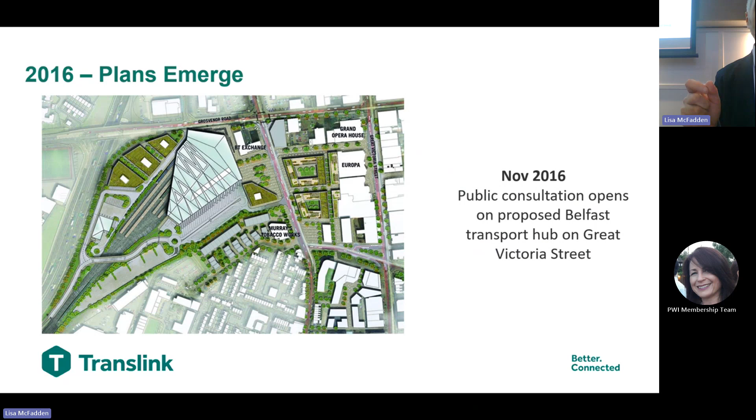But pre-delivery, there's a lot of work for engineers to do too, to make sure they're involved pre-delivery. Coming onto the next slide, 2012, 2016 were key years for the project. KPMG did a study in 2020 and said only 51% of projects are likely to reach their original intent and goals. They continued: the biggest mistake project teams and project managers can make is to assume, and the biggest mistake end users can make is to let them assume.

At that time I was involved in the project but incredibly busy, and we're a very small company, still quite small. But at that point I had to say, right, what do we need? Well, what do we want? I usually start with what I wanted. What do we want out of this?

And then I very quickly realized you're not going to get everything you want. But what do you need? What are you not willing to compromise on? Why do you need it? And where ultimately can we flex? Because on this site there's architectural, bus, rail, public interface, permanent way, and me sitting in the corner going, I demand this and nothing but this. So you had to know where you could flex and where you couldn't.

And I suppose coming out of that, for me, there were golden rules. Certainly you've got your standards and what's allowed and so on, but what's optimized and where will we not go?

Because we were so busy, early on there were conversations around what this was going to look like. When you talk to the operators about wanting all trains to go everywhere, well, we're not going to be able to allow that. Why do the trains need to go there? There were certain limitations on where trains could and couldn't go. If there wasn't a realistic need for the train to go there, we weren't going to build it, because of the risk associated with the S&C and the cost associated with it.

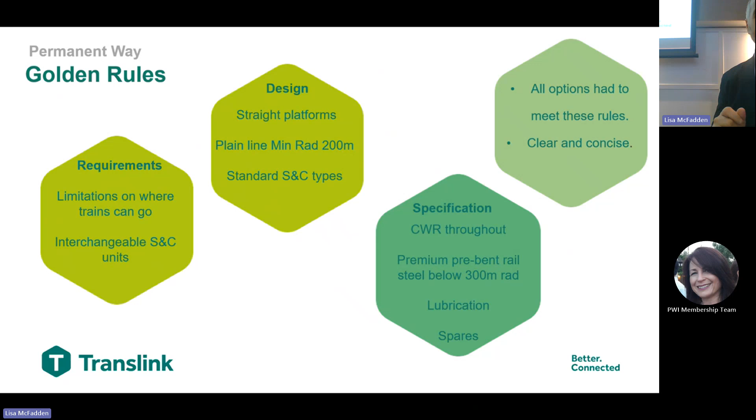The beauty of that was then, coming from that, the end position we got to - whenever it was ready for delivery, I remember being brought into a room and somebody said, we've got 42 different options, we've narrowed it down to 42 different options. Okay, do they all meet the rules? No, 17 of them don't meet the rules. Turns out you only got 25 options. And we got to that position straight away. It made it so much easier for us, because you weren't involved in all the optioneering, but you knew all of those 25 options met the golden rules.

They all worked for us. There's variations on a theme, but they all work. So really it was what was selected at that point in time was the best fit. Everybody didn't get everything they wanted, but I think everybody got what they needed.

How good a position is that to be in a project 4 or 5 years before it actually starts being built, that you know you're going to get what you want at that point. And the solution that we have in front of us today, which goes back to the solution that was on one of the earlier slides, met all the golden rules and many of them were bettered. So from my point of view, that was what needed to be delivered.

And then it was time to deliver. And Lisa's going to tell us how she went about delivering it for us all.

Good afternoon all. So today there's a clear vision we can hear from Translink's point of view, and starting in 2020 was my journey on the great Belfast Transport Hub, as it was a project, but Belfast Grand Central Station as we know it today.

So where is it for those who may not be fully aware of the Belfast area? It's in a quite constrained site, as you can see. It sits aside the Westlink. It's got Grosvenor Road, Durham Street, and an existing railway that went into Great Victoria Street sitting on the other side.

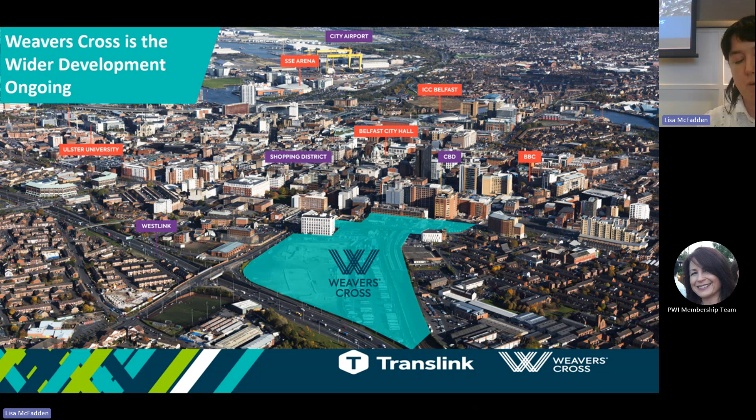There we've got an aerial view. Looking back, you can see the iconic roof structure at about 12 o'clock on the slide. And it's sitting within 15 minutes walking of the city centre. It sits right behind Great Victoria Street and the old bus station that we had.

So the project ambition was pretty clear. We want a transport-led regeneration project. We want to transform Belfast City and the wider Northern Ireland. And we want to connect local communities and neighbourhoods.

Mona touched on it earlier, decarbonisation has become a huge part of what we do. We want to set the high standard not only as a project, but also for communities and by social requirements. We want to see a construction project that does something a bit different. We also want to be climate focused, and there was a key purpose in how to deliver this facility on the ground.

So how did we get to this? For those that don't know, there's always clear interfaces. The building we will not be covering today. We're largely focused on the railway side, but it gives you an idea of the number of platforms - we went from 4 to 8. So we have a bit of a game changer from a timetabling and operational point of view too.

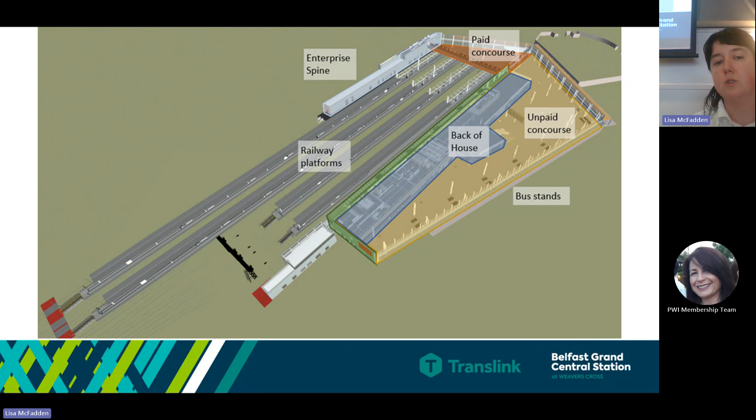More space for our operational colleagues, and we kind of keep touching on it - we wanted this to be a transformational project, a flagship, something to be proud of. We know rail has increased dramatically over the number of years. We know tourism is on the increase. So we want something to showcase this city.

We didn't get here alone, and I think this is the point where we need to go through our suppliers. Arup was the P-way designer for the tracks, and Mervyn touched on the key rules and requirements we set. Babcock was the S&T designer and also the S&T contractor. Babcock was the P-way contractor. Byrne was the slab track designer out on the existing railway corridor for the formation. And Arcadis was our NEC contract administrators. But TransLink on this project was the heart, and worked collaboratively with all these suppliers throughout.

I'd love to say we landed on site, we owned the land, and we could rock up and start laying track. It's never that simple.

The piece of land we see going through did have ground conditions that we needed to address. On the enabling works, there was also an existing Blackstaff River culvert diversion that was part of the enabling works in 2020 that needed diverted.

The NIROC was also quite a late change in the contracts where we basically said, okay, we have an opportunity where we have an old NX panel - it's time for an upgrade. Parts were getting difficult. It also became part of this project and was a separate contract, but with the same milestones and same program to deliver to.

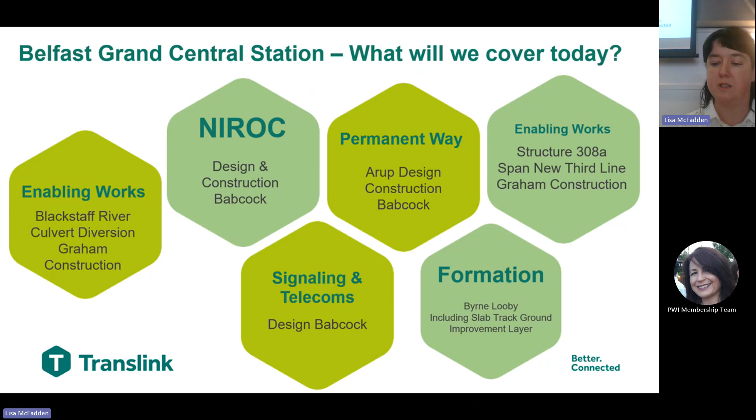Signalling and telecoms was all designed and constructed by Babcock, and the formation we will be touching on today is Byrne, but there was two formation designers in this project, one with the FSGV joint venture, Barnes & Sear, and one by Byrne, but again with transition zones and interface meetings to control that as well.

So where we start back in 2020 - what needs to be done? Unfortunately, there was a Blackstaff culvert sitting high across the site. We were quite constrained - I can't lower the Blythefield curve. We were very constrained with those existing levels.

We were a traditional track bed, so bottom ballast, top ballast in your rail. There's no slab track on this project. So therefore, with constraints with that depth, the culvert had to be lowered.

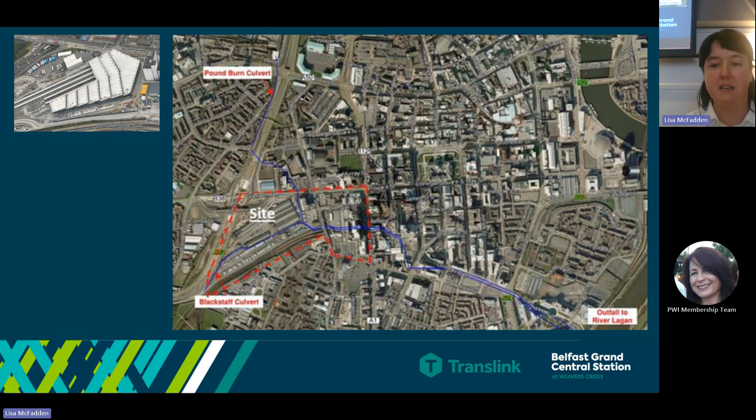This involves things like, before you start, ecology surveys, devegetation works, archaeology assessments, and working with our frameworks and contracts teams to basically get this in place and understand what we needed to do.

So the length was no small feat for Graham Construction. The length was 360 metres. We need a transition slab for the imposed train loading. We also had a 600-millimetre reinforced concrete section. And to put in concept, it was a 7-metre by 2-metre box culvert where we'd cross the P-way.

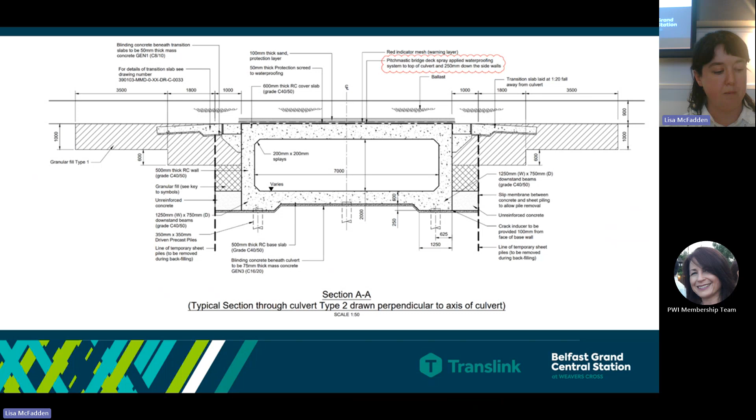I've kind of shown a slide the cross section. So you can see there the 7 metres by the 2 metres, the internal dimensions. You can see the thickness of the slab. And you can see this was basically under the railway lines as they approached the new station, while the eastern part was under the new bus terminus.

I've also included a slide to show the transition slab that was right on the western end of the culvert, between the new P-way alignment, and then obviously considering this was a design working life of 120 years, a category 5 in accordance with BSEN 1990, and also making sure the hot, hard and soft spots was also addressed.

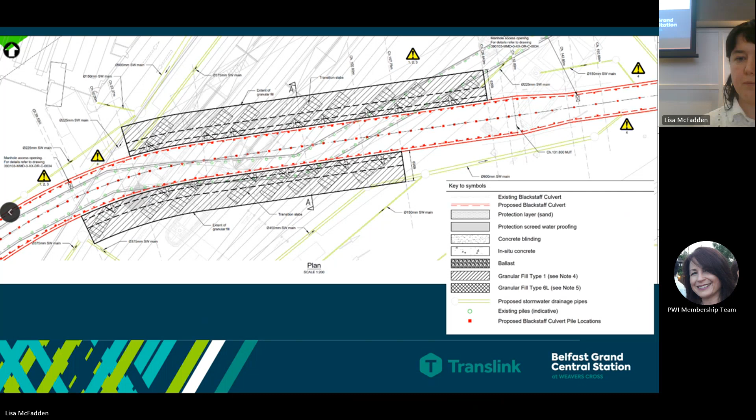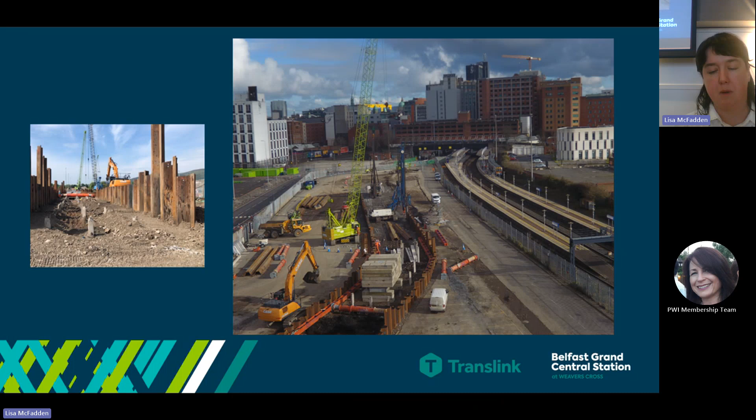Throughout this project, there was extensive site supervision, rebar checking, and one of the key things that was done on this site was the amount of work you could do on the brownfield site. So basically, get as much work done that's outside the existing railway corridor as possible to de-risk the back end of your programme and ensure successful delivery in 2024. And that theme is the whole way through the project.

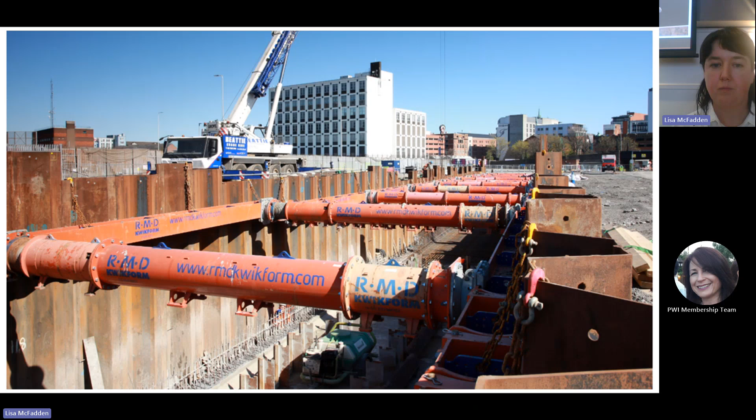Another kind of good drawing there shows the Graham Construction as well, just the scale and the size that traverse the site. That point in the photograph is where the new railway tracks crosses into Belfast Grand Central Station.

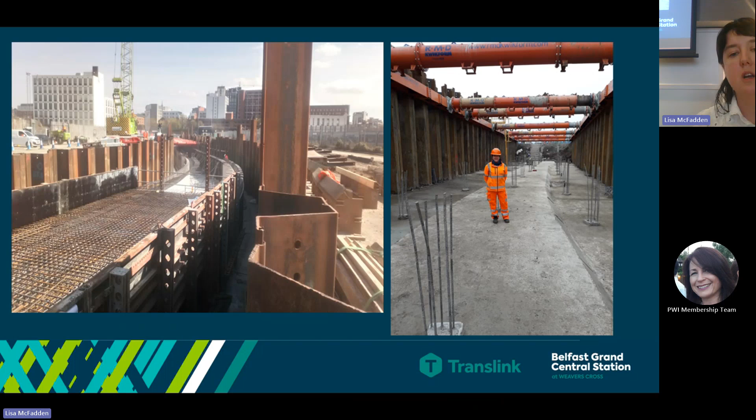Again, you can see the size of the reinforcement deck and all reinforced steel. Also, I should point out this was in 2020-21, probably not the most ideal time with supplies and materials and trying to get it. There became quite a logistics challenge from a program manager perspective to make sure you had everything sourced and then acquire more land to place the materials on.

It didn't stop there. Also for 308A, there was an existing pedestrian bridge, so we had to increase the length of the steel bridge. This was delivered under Graham's Construction under the enabling works.

Basically, in order to widen, there's an up and down line, but we also need the additional line coming into Belfast Grand Central Station. You can see a lot of groundworks - we had to provide 8 soil anchors, approximately 70 metres long, to support the existing east abutment, and 8 mini piles to support the new east bank seat.

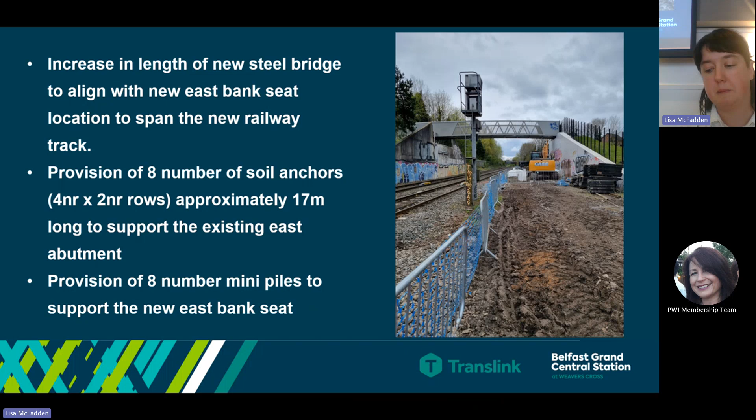There was a relocation of the east bank seat about 3.5 metres back from the existing east abutment. One of the challenges is when you do your groundworks, we hadn't moved the track at that point, so clearances was a big thing we had to be careful of, since trains were still running into Great Victoria Street. There was a lot of signal sighting consideration working with our colleagues to make sure the ground anchors didn't pose any signal sighting issues.

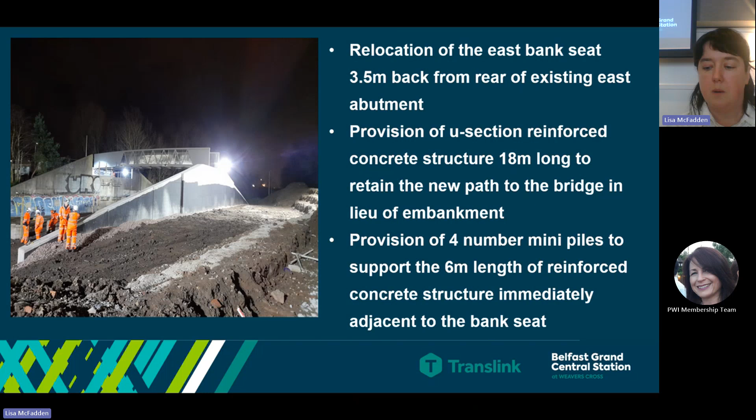The railway formation design was a significant amount of work, more than probably any of us ever imagined in 2020. There was an area of 150 metres which was poor ground - this is basically as you go between pedestrian bridge 308A and the new busway bridge, which I always call the rusty coloured corrugated steel bridge, that crosses a 51 metre span over the new railway.

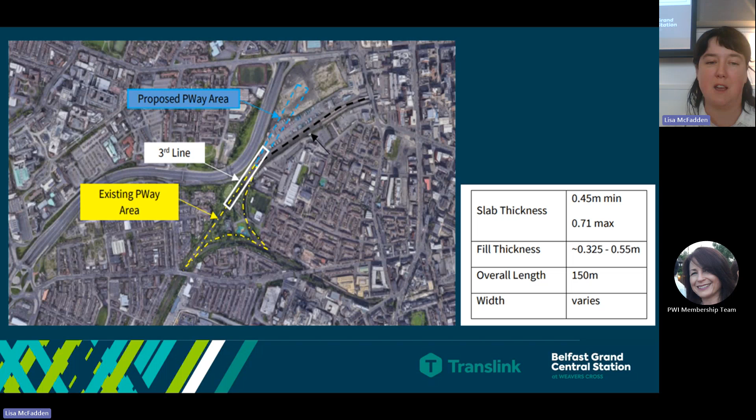We didn't install any slab track - we wanted to respect the maintenance requirements as well, so we wanted a standard construction makeup of the railway track. Below the ballast is a 600 mil depth reinforced in-situ concrete slab to support the settlement requirements. There were quite stringent requirements set from the start, but the whole point is that we do not need to maintain this for a significant amount of time.

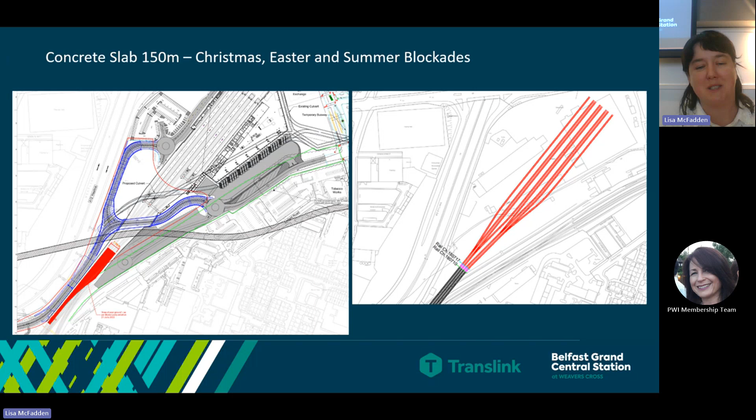It wasn't that easy because unfortunately where it spanned under the brownfield site, behind the railway corridor, was where you could work during the day. Unfortunately, the bottom of the red sat directly above the existing railway that went into Great Victoria Street, and then we had a construction street environment to construct the top left part.

So we had to use 3 different blockades to get this constructed. We did a lot outside the brownfield site, but we had to utilize the summer and Easter blockades. We couldn't pack everything into the summer blockade, because that would mean the blockades keep extending, which has a knock-on effect on revenue.

So we looked at clever ways to pour the interface at Christmas, get as much done by Easter, and then leave the area in red to complete at the front end of the summer blockade in May.

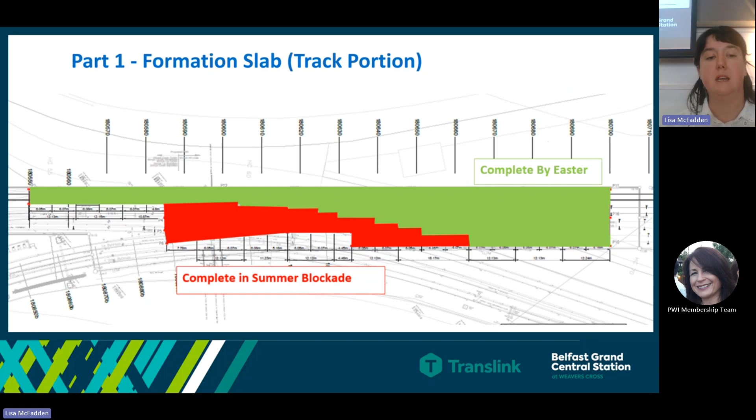The signalling and telecoms in the permanent way - probably why we're all here. We're finally able to get into the ground and deliver. We've done our enabling works, and now we're at the point where we can actually lay track.

I picked this slide up again because it's a good reminder of the scale of where we come in and set the track, in the Blythefield curve and into the Belfast Grand Central Station, and also the extent of the signalling and telecoms. It's pretty clear, due to the size and scale of changes to the permanent way in Belfast Transport, it required significant new and modified S&T infrastructure.

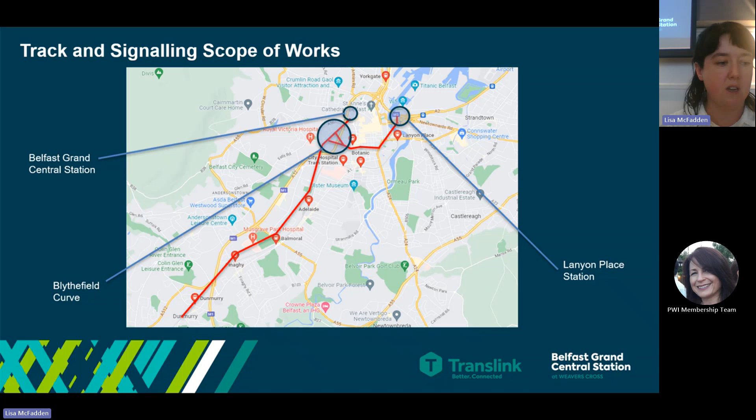A new route relay interlocking has been provided for the new Grand Central Station, and that's to replace the existing Great Victoria Street system.

This new interlocking is the largest built for Translink, and one of the largest installed in the UK in recent years. So it's important to keep that in mind, and also a reminder that you can't keep packing everything into a blockade.

Before we got to 2024, there was a lot of ancillary civils and advanced procurement of contracts and materials, because there was a race against time of procuring steel, relay rooms, PSPs, and types of cables, all with very long lead-in times. So we couldn't wait until Easter 2024 - we had to get a plan in place.

One of those things was basically understanding what advanced goods we needed to have. But logistically, that also gave us problems of where do you put that.

Easter 2024 was a great trial run. It basically helped us understand if our compound works, our logistics, how to access track, how well the whole team works. It was the first point, from a permanent way track installation perspective, that we got to see how we all work together - the first real test from a P-way point of view.

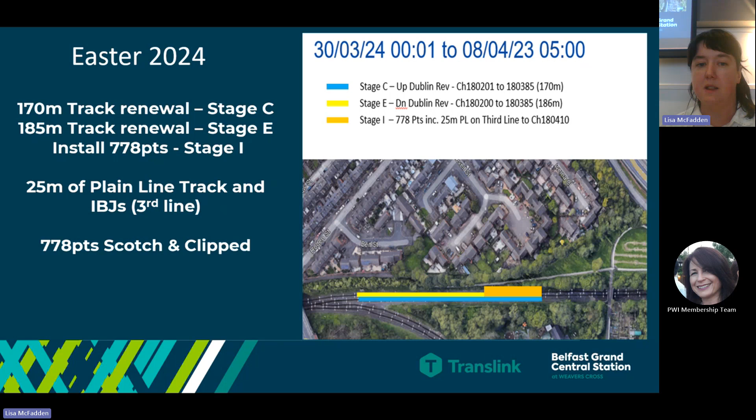In Easter 2024, we did the little area you can see in yellow and blue - 170 meters and 186 meters, on the up and down Dublin lines. We also put in the 778 points. You can see the area we're talking about, just at the back end of 308A.

One of the challenges the teams faced was what plant, what resources, what do we have available - which, coming from Network Rail where you've got an endless amount of suppliers at hand, is different, because you very much have to work in that lean way in Translink.

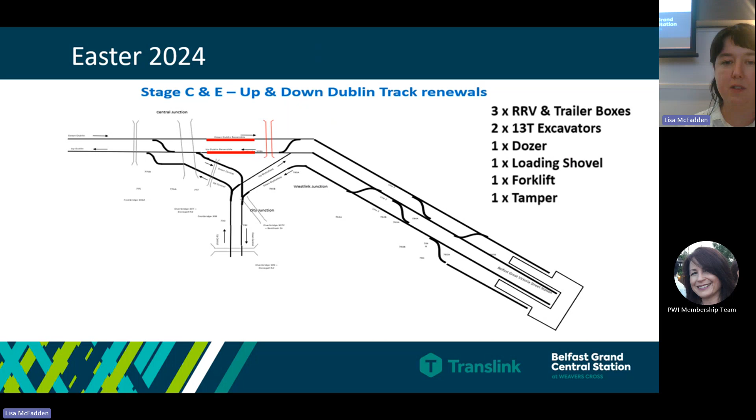We had 3 RRVs and trailer boxes, 2 13-ton excavators, 1 dozer, 1 loading shovel, 1 forklift, and 1 tamper, and we delivered the plain line. It was a good test to understand how everything was going to work for the big blockade in summer.

To give some context, and I have the same statistics for summer: the ballast was 1,300 tons, spoil 3,300 tons, sleepers 530, plus the points and the type fill. Not on a huge scale, but it tested the water to understand how we work logistically around each other.

We also had the main works contractor working on the other side of the boundary fence, so there were certain interfaces and also how to work from a CDM boundary that had to be considered.

Here's some photos of laying the track. It's quite visual as we go through the slides now, and you can see what we've installed - that's the up and down Dublin, and you see in the first photo the 308A that was delivered during the enabling works.

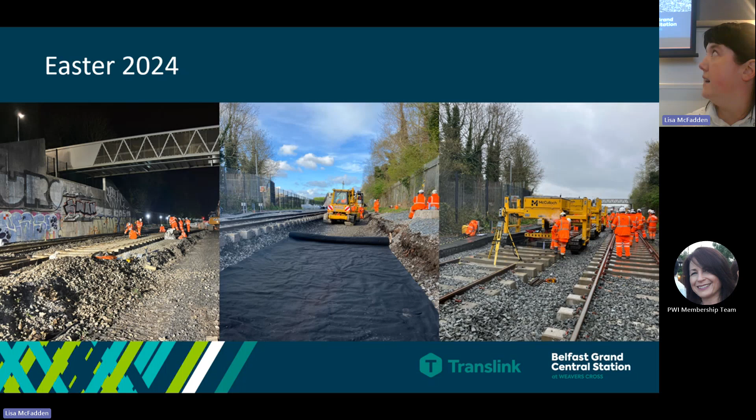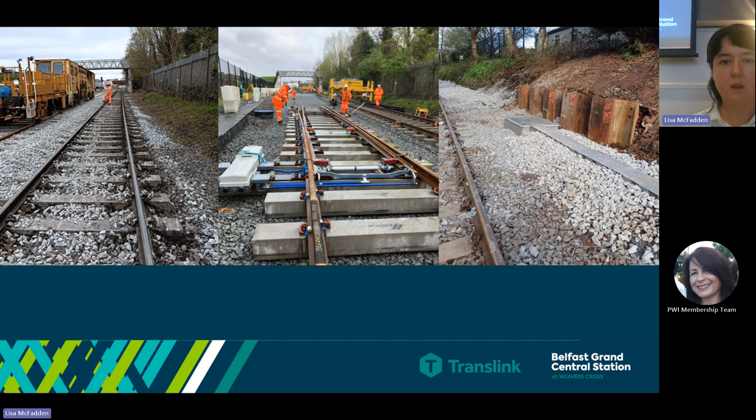Here's a nice schematic plan showing the 778 points with bridge 308A there in red, and a few more photos showing 778 and the tamper in for the completion of the works.

Mervyn touched on it as well - there was a lot of work and requirements stipulated from the start. Some of the key information: the P-way and S&T was largely undertaken during Easter and the main blockade in summer 2024. We'll go through that more in the slides as they come.

The details of the wheel-free limits and the signalling protection, the operational arrangements, was also undertaken to facilitate whole system integration, including NIROC. Same milestone, same dates, had to come as one - one depended on the other. You couldn't deliver BTH, or Belfast Grand Central Station, without NIROC. Apologies - NIROC is Northern Ireland Rail Operating Centre. We'll explain that shortly.

The plain line sleepers were the NIR01 and NIR19 types, concrete throughout the project. Concrete sleepers with undersleeper pads were used throughout the project.

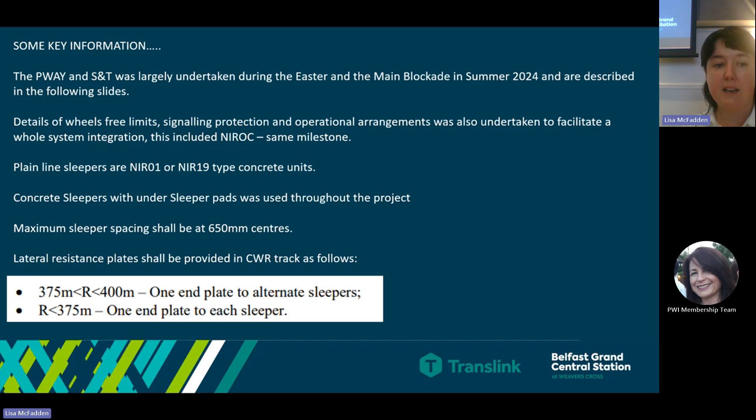The maximum sleeper spacing shall be 650 mil centres. We had lateral resistance plates provided in the continuous welded rail track, with certain criteria to follow too. The maximum length of rail between two fish-plated joints was set at 18.3 meters. The minimum ballast depth beneath the design bottom of the bearer was always kept at 300 mil.

The track filter drainage was used throughout and was designed to network rail standards, to the 1 in 50 plus 20% climate change, checked for the 1 in 200, and checked for the 1 in 500. So basically future-proofing, that we should never have wet beds on this job.

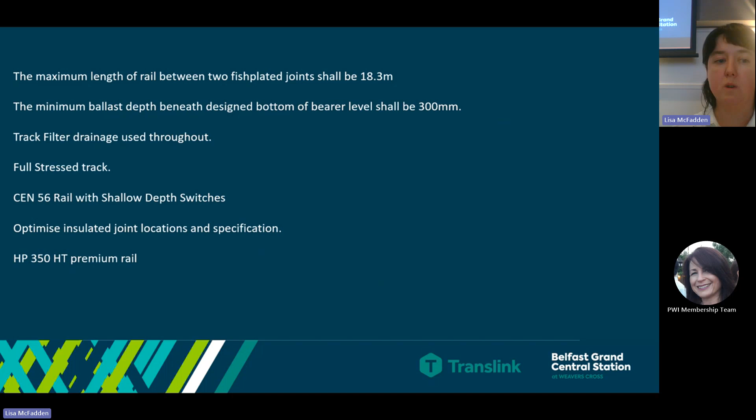We also wanted a fully stressed track. We used CEN56 rail with shallow depth switches, and used optimized insulated joint locations and specification. We really wanted to start using premium rail on this job too, and use it throughout. Again, the maintainer was always at the forefront of our mind, helping to reduce maintenance in the future.

So we've touched on it earlier. NIROC was very much a part of the project, and the project teams all sat together, bringing the S&T, the P-way and NIROC in on the one date. So what is it? Because a lot of people don't realise Northern Ireland Rail Operating Centre is a new ROC.

Based at Lanyon Place Station. The railway operations in Northern Ireland are currently controlled from three separate signalling control points, namely Belfast Central, Portadown and Coleraine, which a lot of people largely know. TransLink had a strategy, same as the vision for Belfast Grand Central Station, to eventually abolish each of these signalling controls and rationalise them into one regional train control centre located at Lanyon Place.

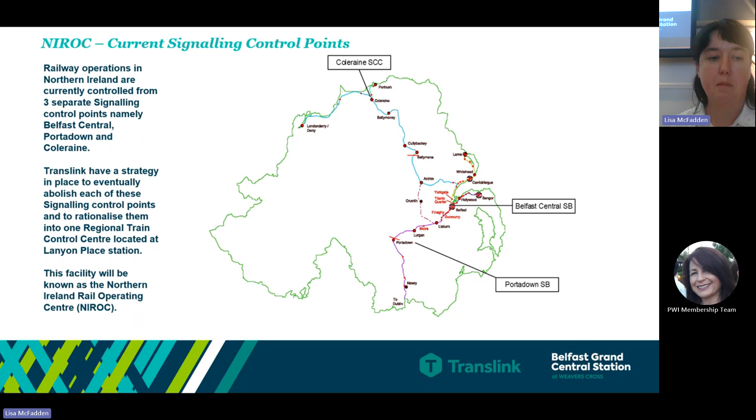And this facility is now known as NIROC. So as you can see, there are some photos. So the changes would be necessary. As we said, we'd use an old NX panel. Parts were getting very expensive and difficult to source.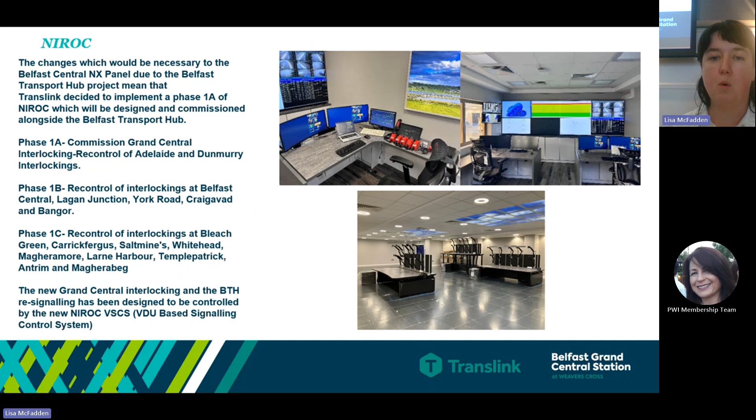We also had a live operational bus that ran through the site at all times, apart from a couple of little mini blockades where we had to build out roundabouts, but it largely never stopped running the bus operations through the site. You can see logistically how hard it was.

We had to install new wraps to allow the nighttime working. CDM boundaries were checked weekly, sometimes daily, and reissued to all contractors, and that was quite a feat. The boundaries were always moving, always making them secure and making sure health and safety was at the forefront.

But there was so much that, from a railway systems point of view, needed to get integrated, like bonding plans and the commissioning plan. I've never seen a more detailed commissioning plan to make sure the entry into service ran so successfully.

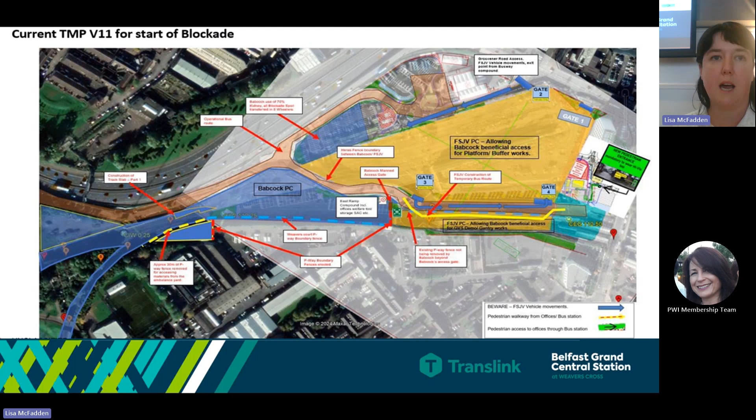If I was to describe my job, I'd say it's like a Tetris puzzle. The pieces fall fast and you just try to make sure there's not as many holes or gaps left in the puzzle. And if you do, you get a contingency, a mitigation plan, and fix it.

This was delivered successfully with the whole team. This diagram shows, as we go through the slides, how the phasing of the P-way and the S&T was delivered.

You've got the up and down Dublin lines shown in blue and pink at the top, with the new line coming in as well. We've got the Blythefields in yellow, and then the up and down Central, shown in the old green, which is now just one chord, the Central reversible.

It gives you a feel for the amount of materials we had on the left-hand side. We had 3 panel lifters, 3 TRTs, and 2 small dozers, but things like McCollam's panel lifters made things easier. One of the biggest things that really seemed to help was having track dumpers rather than rubber-wheeled ones. The 360 turn, able to get in and out quickly on site, really helped from a program point of view and ensured everything ran smoothly.

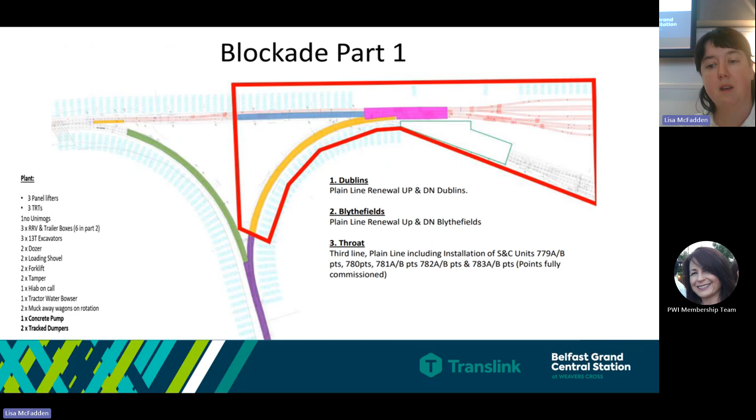There was such a detailed hour-by-hour program, which, to the credit of Babcock, kept everything quite robust and realistic in terms of what could be achieved. We started on the 11th of May 2024, when Great Victoria Street closed for the final time. There was 11 hours of signalling.

As you can imagine, in the first 11 hours of the blockade we needed to be wheels free. There was all the decommissioning from Great Victoria Street, and the area shown in black, which is now becoming redundant on the right-hand side going into Belfast Great Victoria Street, needed to be burned out and stripped out. That area is now the new bus yard.

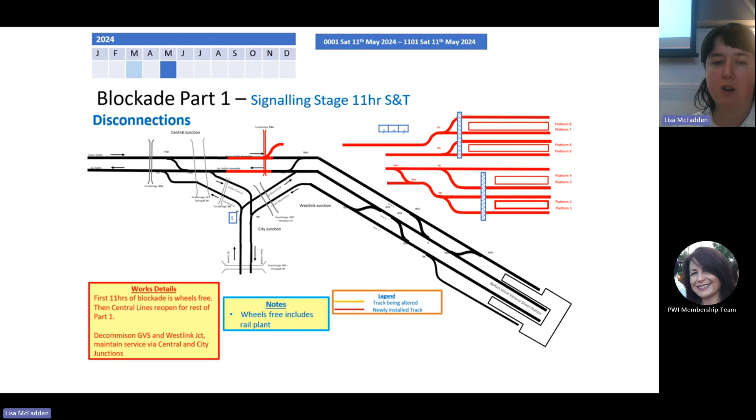So there was a rapid speed needed come the 11th of May by both contractors, from a lay-down area and also from a bus yard point of view - straight in and straight out. I always found the different phases interesting; at the 11th of May, for one week, you could see the intensity with the amount of heavy engineering works required for the amount of materials being lifted out.

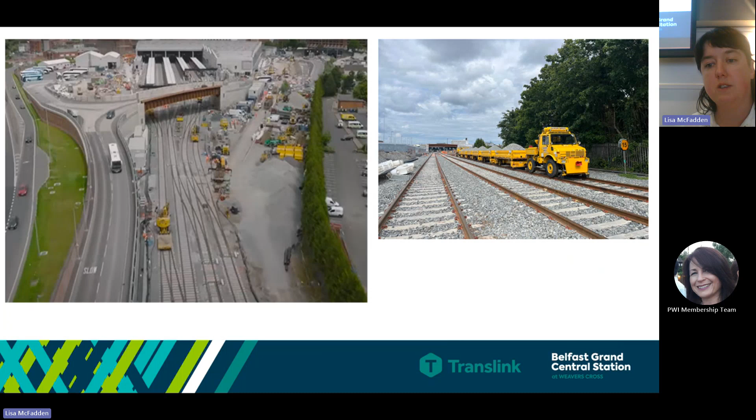In 2021, we also awarded ancillary civils contracts to Babcock. There was an extensive amount of troughing work, bases, and drainage, using the rules of the route called T3 possessions, meaning you work between the last train and the first train to install all those civils-type assets. That was one of the biggest, and probably most challenging, periods we had.

I'd describe it, when I spoke to my mom about what the work was like from 2021 to 2023, like peeling the biggest bag of potatoes. It's tedious, it's repetitive, it seems to keep going on and on, but the beauty is the roast potato at the end - that's the only way I can describe ancillary civils.

It just seemed repetitive, dealing with problems as they came. If we hadn't dealt with those problems, we would have been in a very different situation going into the summer blockade. It meant all the uncharted services, the sheet piling, and all the heavy, bitty work was cleared before we got into the main blockade.

We also had to work very extensively with our colleagues in operations, because it's not easy to shut down a railway for this length of time. There were hours and hours spent going through blockade strategies, understanding our revenue time when it's not as peak, and using the summer blockade as an ideal opportunity.

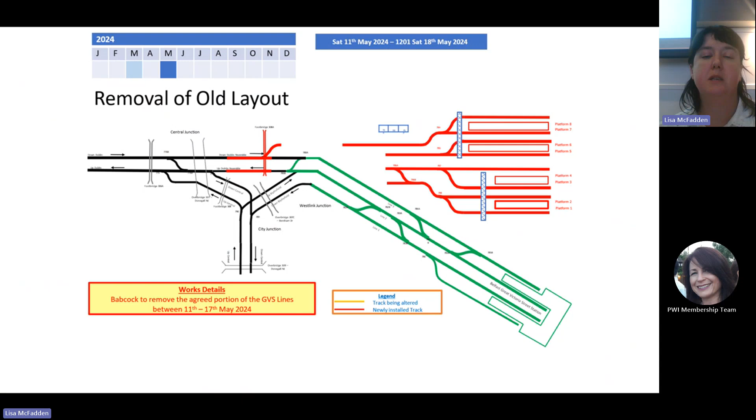In 2021, to try and beat the markets, we procured all of our rail, 100%, and procured all of our sleepers. But where do you store it? So we had to acquire land out of this project.

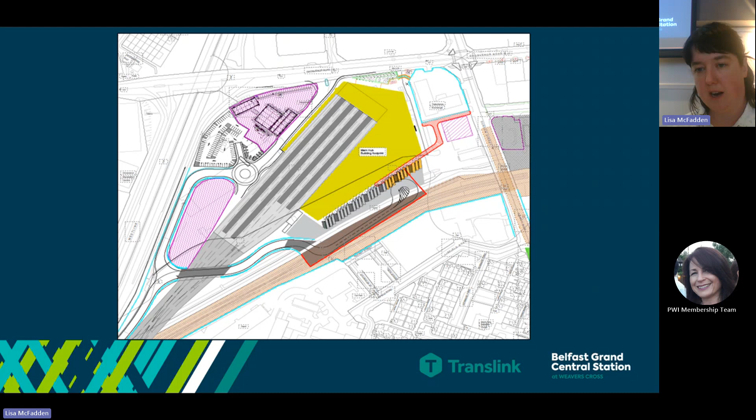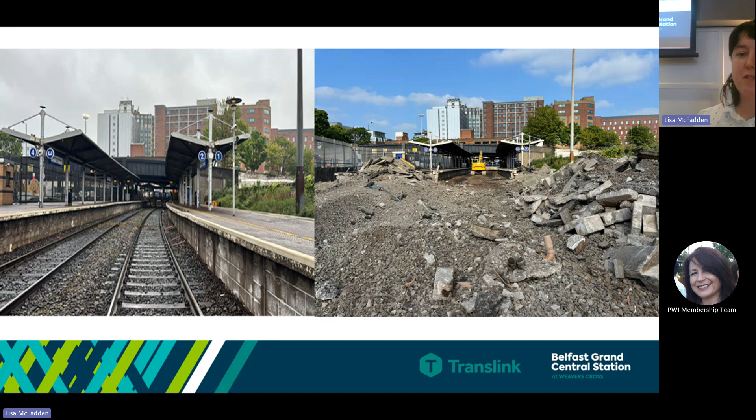There's some good photos. This shows Great Victoria Street on the left, and that shows literally the day after, on the 11th of May, just a couple of days after, how quick we had to go in and strip out and be ready.

So 11th of May, stage 3, it kept going. You can kind of see from the 11 hours of blockade, wheels free. You can see the Adelaide and Botanic, the Charlie Limas that we were basically working on.

The wheels free period is also quite challenging as program manager. It's basically a lot of coordination with the wider business. You can't have other people out working, obviously steel on steel, so it's just getting that communicated across the business.

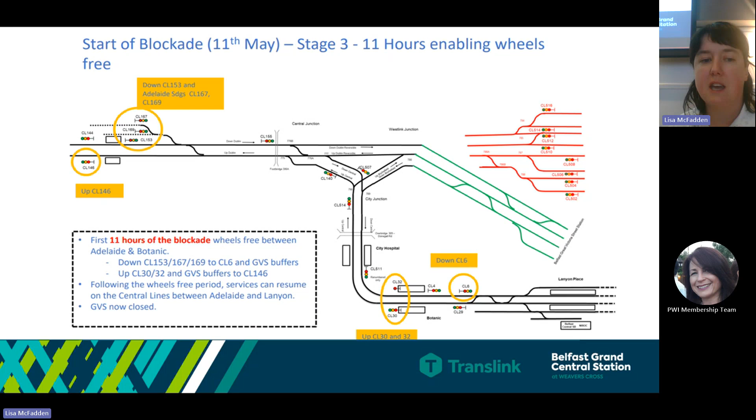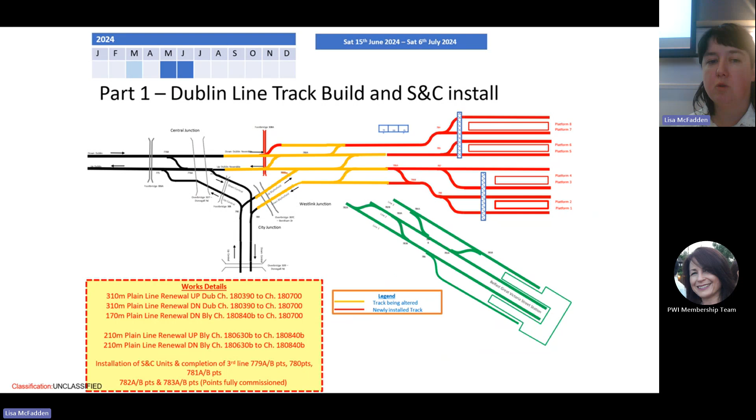We continued on, so that's a good idea of the scheme plan with a bit more detail. Everything in yellow is what we built in part 1 of the summer blockade. I say part 1 because at this point, everything was running into Lanyon. So the central lines, up and down, central, were still operating, but it was only Great Victoria Street that was closed.

We've got a few photos that show the sequence of work. In week 1, you can see the scale, the amount that had to be ripped out, the amount of laying, and then you can also see the concrete pour on the bottom right of the slab that had to be done for the remainder of it.

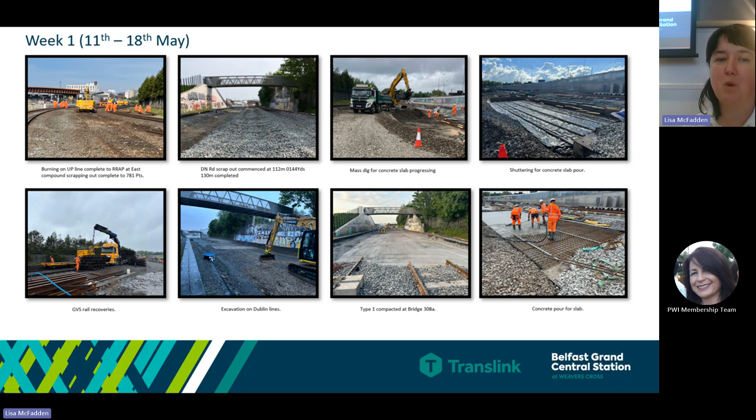That actually created a challenge because it creates a bit of a constraint and a bottleneck on your site as well. So that's poured, cured, and ready for loading. Again, working with suppliers and designers, looking at accelerators and how we can speed that process up too.

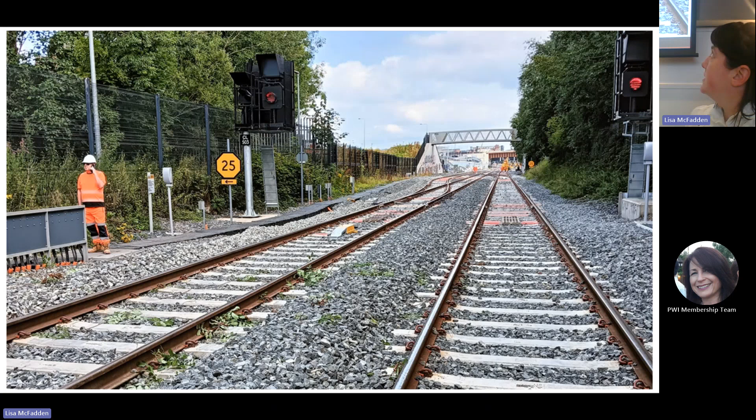Photos looking back towards the station. That's from Bridge 308A, and you've got the busway structure in the background. Again, you can see your crossovers. And that's looking again towards the station, which is at the furthest point in that photo.

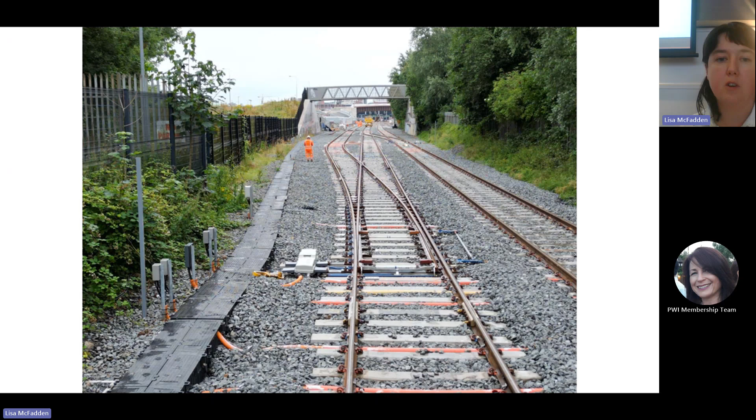Some more photos that people probably don't see, what works behind the scenes - topping up stone, the tamper on site. Our S&T colleagues always feel like they never really get a fair amount of photos. It's always the big p-way stuff, but there's loads of signal and telecoms work too.

I've learned so much about tamping and so much else from an S&T point of view on this project, but continuous testing and commissioning to make sure every system worked as a whole. So there you can see the works in effect during the blockade, all the amount that had to be done.

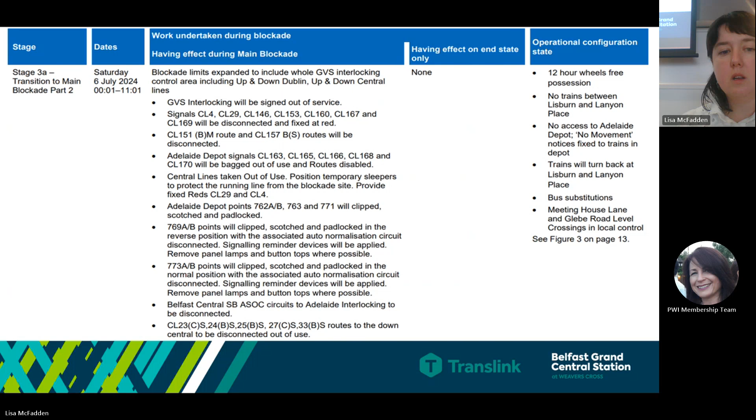Then part 1 is where we transition into part 2, and this commenced on the 6th of July. At this point, this is when Lanyon, the lines around Lanyon, close. So that means City Hospital comes out, Botanic comes out, and the wider disruption, including the enterprise, started.

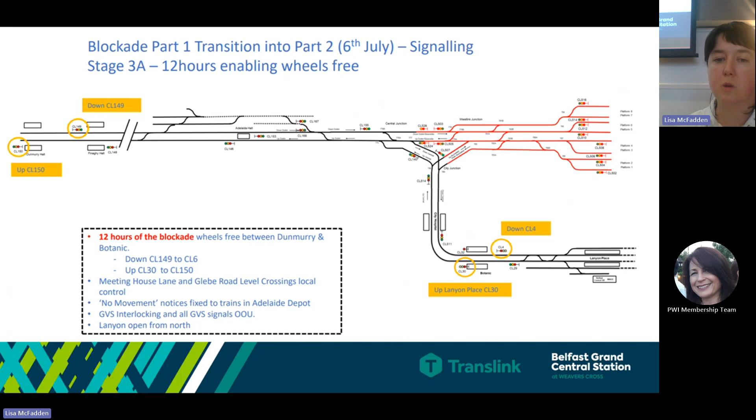Again, you start off in your stage with 12 hours enabling wheels free. That allows our S&T colleagues to go out, doing a lot of disconnections, getting the GVS interlocking and the GVS signals, and then only Lanyon at this point is open from the north - so basically your Bangor trains and your trains to Coleraine and Derry, Londonderry.

So in part 2 of the blockade, you can see everything in red is now built. Halfway, probably on the screen to the right, was built during the brownfield prior to the blockade. Everything in red there on the Blythefields - the up and down Dublins were built previously during Easter and part 1, and now we're focusing on the centrals, the up and down centrals, making those interfaces and connections where before we could only go so far because of the live railway nature in part 1.

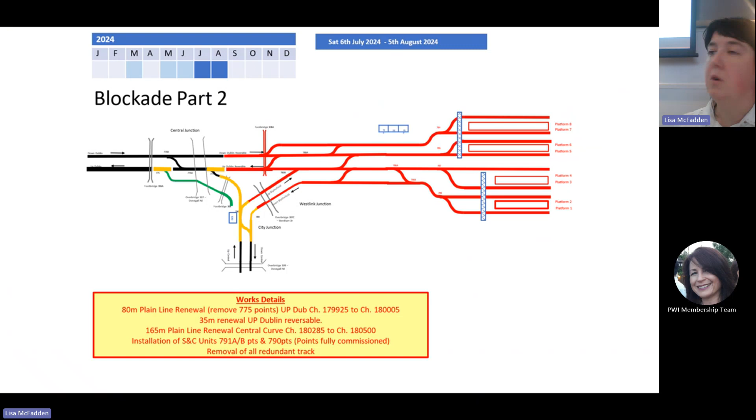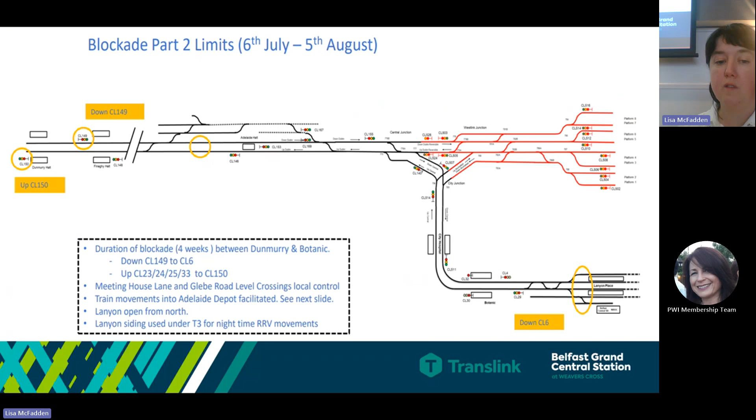So this blockade was 4 weeks. It really was between Dunmurry and Botanic. It includes things like Meeting House Lane and Glebe Road level crossing controls, a lot of limited train movement into Adelaide Depot. So there's a huge amount of coordination as program manager with them as well, using Lanyon sidings and any way we can from a siding point of view for RRV movements. That was critical as well.

Got a few more photos of this in part 2. This is very much looking at the photographs on the centrals, and obviously it's just a central reversible now. As Mervyn touched on, now the trains come into Belfast Grand Central Station for Portadown. It's a terminus station, and then they go back out around Lanyon rather than going from Portadown straight to Lanyon.

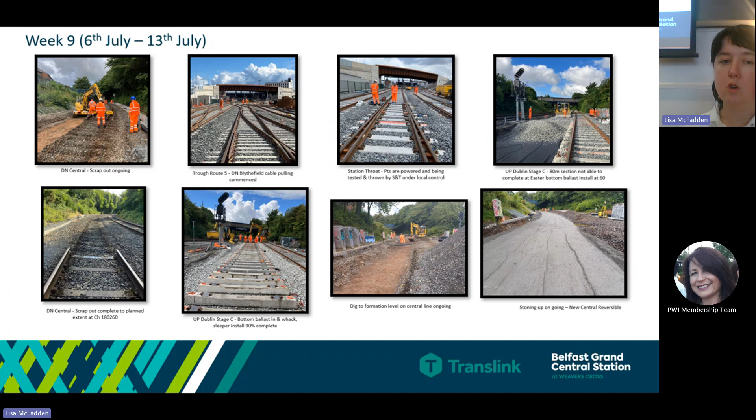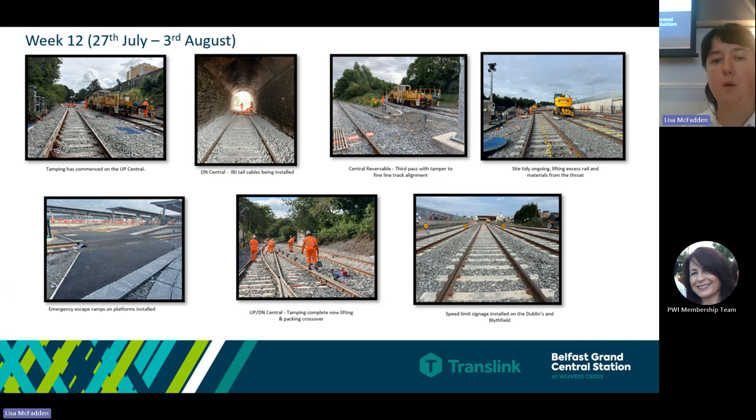Again, that's looking down towards City Hospital. In the bottom left, you can see there's emergency escape ramps at the bottom of the platforms, so working again with our colleagues, Fire and Rescue, as an interface. Then you can see the quality of the track install in the bottom right, making sure it's stoned up, ready to tamp, and ready for operational use. Some good photographs, you can see it's probably quite constrained, with City Hospital sitting in the back of the photograph. Sharp crossovers, quite constrained - you have to work with what you have.

And that ran from the 5th of August to the 12th of August, and that was a hard milestone in the railway project. On the 12th of August, we had to commence driver training, and that's when we handed over to our operational colleagues and end users to take over the track.

It's all a huge system, that's the only way to describe it. There's a huge amount of signalling commissioning as part of this project. It all had to work as one - as I always say, you had to press the button and everything works together on that 12th of August. There were no separate contracts working in isolation - we all had to work together as one project on the railway side.

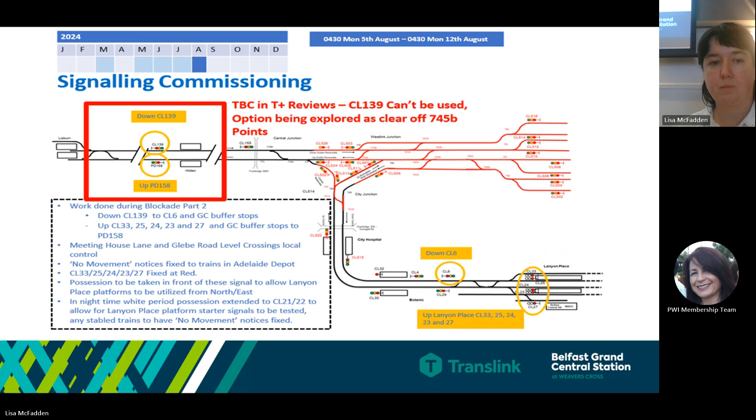Just this past Sunday, we had our first public live operational railway. This project was classified as significant under CSM, so we went through the whole authorization process, and we were given the green light for last Sunday's first live public rail, which was a great milestone for Translink.

Just going to play a short video to sum up everything we've done and end the presentation.

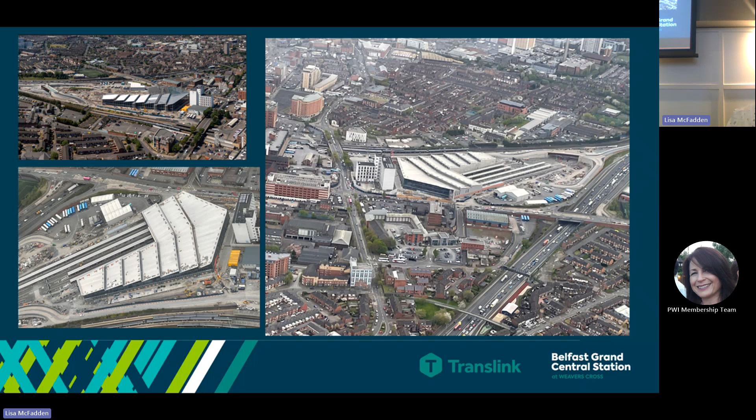This is a few photos to show an overview, and we're open to questions.